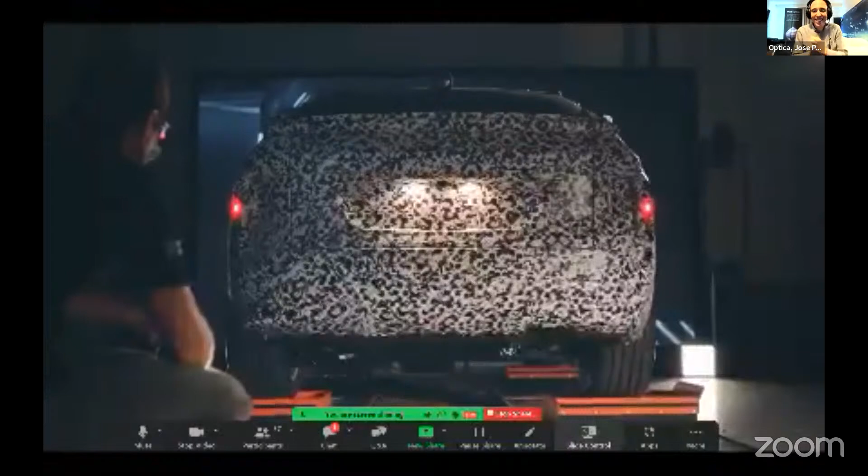The whole idea is to make sure that we understand what the next OEMs and Tier 1 suppliers in automotive need from the rest of the supply chain of photonics. And today we have a great supply chain of photonics. We have companies that manufacture equipment like Besi, like ficonTEC. We have companies that manufacture micro-optics, like SUSS MicroOptics, like EVG. We have companies that manufacture laser detectors. The entire supply chain is here.

My name is Jose Pozo, and I speak on behalf of Optica. Optica, the big publishing group, Optica, the big individual membership society, Optica, the big corporate member society, now with 400 industry members trying to find ways to work together. I lead a team of experts on the photonic industry, and our job is to find business for you.

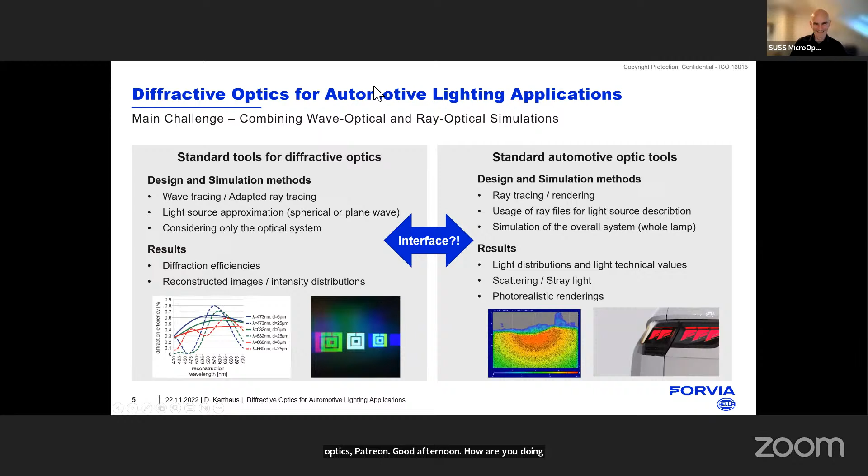Patrick, good afternoon. How are you doing? Hi, Jose. It is great to have you here. So just heard the challenge on the table by Hella, a company I know you know well. I think there is something here that you can contribute and start having the discussion.

Daniela is an expert, and we're in constant exchange with our team. It's amazing to see what they do with diffractive optics. We do more refractive optics for automotive. So yeah, that's a great collaboration so far. I think you have something to show us, right? Yes.

So this is what we do. We're covering many of the things that Daniela showed. We're also doing these projections, these semi-dynamic projections, MLAs for that. You see the setup at the top - this is the typical setup: LED, collimator, and a micro lens array. We concentrate on the micro lens array, and we can do the simulations for these as well. You see a snapshot of one of these optics here, and we manufacture them on a wafer level, which is very competitive if you go into large volumes. These can be used for projection optics, for headlamps, and for interior projections. We have perfect light mixing, color mixing, and you can project on curved surfaces.

Daniela was talking about the different needs for diffractive optics, diffraction efficiencies. Is there anything you can provide here, added value to the diffractive surfaces, such as the use of coatings? What is the standard process that you use for the diffractive elements?

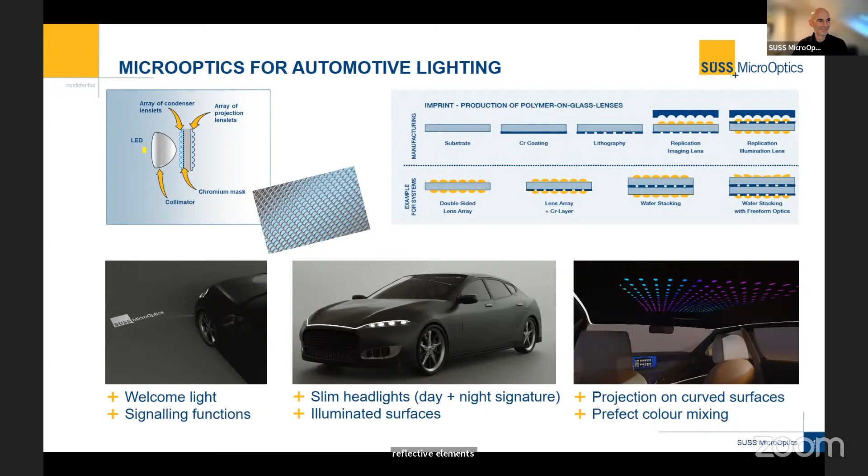So currently on our refractive optics, we don't use coatings - they're coating free. For the headlamps, we just had a very interesting simulation done where we can show that we're reaching up to 40% total efficiency of these headlamps, which is amazing for the small volume of these devices. The volumes, especially in the Z direction, are very tiny - you have these small slits, almost invisible, and you still can achieve 40% efficiency.

Yeah, and I guess now I will get a question from Paul Henry or from others - Paul Henry is also pushing for this, from Volvo, for a long time.

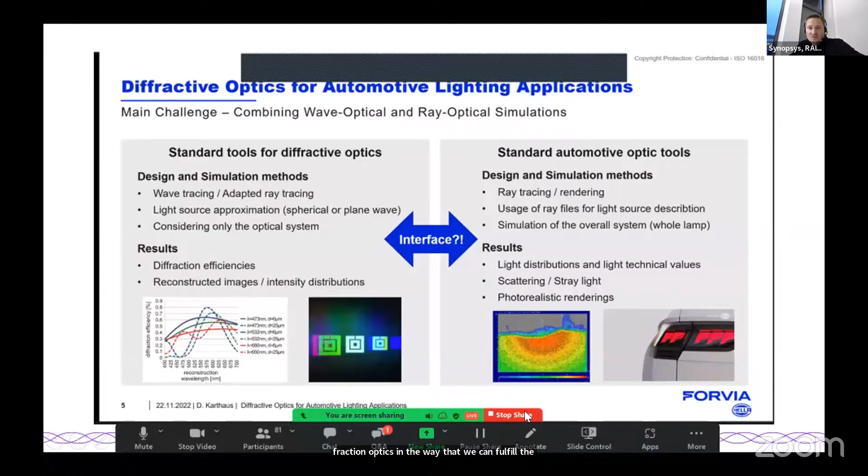Hello everybody. For us, it is important to know what is really required between diffraction optics and geometrical optics, because our business is to provide optical design tools, like simulation software. I'm not sure if Daniela's company is aware, but they are using our tools already in the method of geometrical ray tracing, but still not the diffraction tool. So we recently started to take a deeper look into diffraction optics in the way that we can fulfill the needs of meta optics and design meta optics, in order to fill the gap between - or let's say in order to produce or exchange classical optics with diffraction optical elements. It could be useful for imaging optical approaches, but also for illumination optical approaches. I would like to have maybe an offsite discussion later on, what is really needed and what is maybe not needed, so that we can develop our tools in the right direction.

Let's scratch the surface first there. Daniela, can you tell us a bit about your idea, what is needed when it comes to simulation and design of flat optics?

Yeah, of course, I cannot go too much into detail, but in general, as I mentioned, we know that kind of adapted ray tracing is already used to simulate diffractive optics, and their standard or regular surface functions are used as a description for the diffractive optics. We need something where we could also simulate stochastic optics and the like - not just regular shapes like gratings or the like. So we need to go more into detail, and we need to find really an interface so that we are able to use the typical analysis tools for our product at the end. So we already have such an interface, and if you want more information about this, we could come together and I can speak about this more in detail.

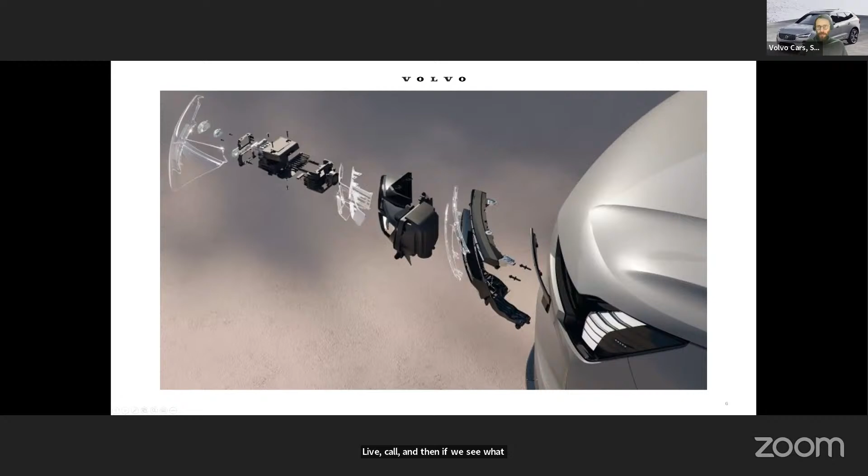And then if we see how this lamp is designed, you can see a lot of components. But what is quite interesting is that we have this same concept when we are by day and when we are by night. So you can see above, it is a daytime running lamp. And then this lamp will open, and you can see through this daytime running lamp, you have the low beam. And then we have a moving design with a lot of components.

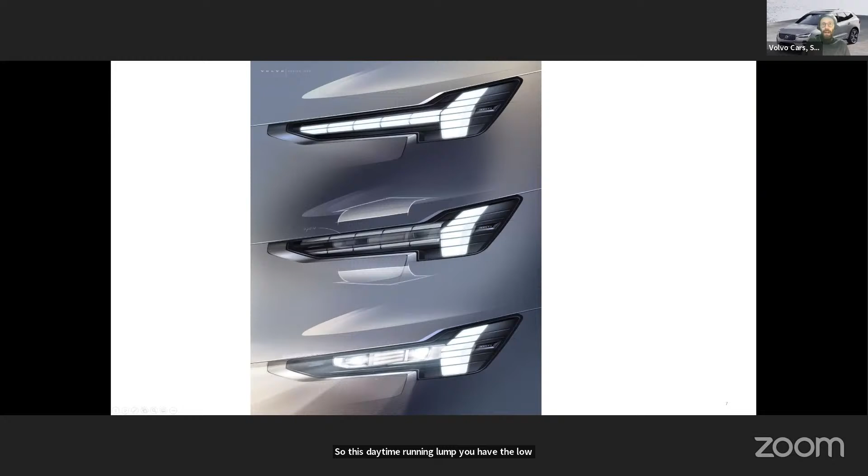And then you can see on the video, I think perhaps you have already seen it. So we have daytime running lamp, and then we open the hammer, and then we go to low beam, and then we have always the same shape. In daytime and in nighttime, we see the Thor's Hammer design. So what you see is that we have designed this lamp with a mechanical concept, with stepper motors.

The question I have is quite simple: we would like to do it only with a digital solution, only with an optical system, to be able to have this design by day and by night with the same optics. So is it possible, and how can you support Volvo to be able to do this design in the future? Thank you very much.

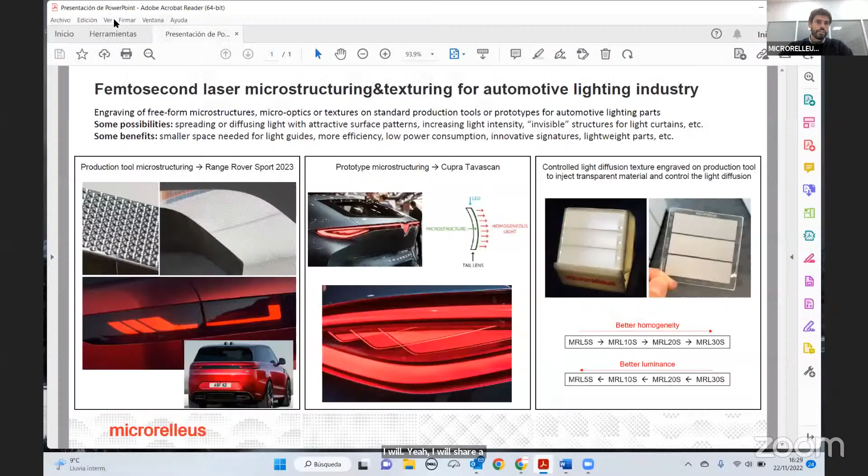I will share one slide just to share what we are doing. Can you see it? Yes. Great. So in microrelleus, what we are doing is femtosecond laser engraving of freeform microstructures, micro-optics, or textures on standard production tools or prototypes for automotive lighting parts.

So some possibilities thanks to this engraving in the tool are spreading or diffusing the light, increasing light intensity, invisible structures for light curtains, and so on. Some benefits: smaller space needed for light guides, more efficiency, low power consumption, innovative signatures, lightweight parts, and so on. So the three ways that we are working in the automotive lighting industry: engraving production tools, microstructuring them, like the example in the Range Rover Sport 2023, where we engrave all the micro-optics on the production tool to achieve this homogeneity in the tail lamp.

Another example of what we do is microstructuring or texturing prototypes, like the Cupra Tavascan concept, where we engraved thousands of microprisms in the tail lamp to achieve this homogeneous light curtain.

The third way we work is engraving production tools to make textures, developed here in microrelleus, for controlled light diffusion. The idea is to inject transparent PC or PMMA and have controlled light diffusion just from the texture engraved in the production tool, achieving better homogeneity and better luminance. That's in general terms what we do in microrelleus for the automotive lighting industry.

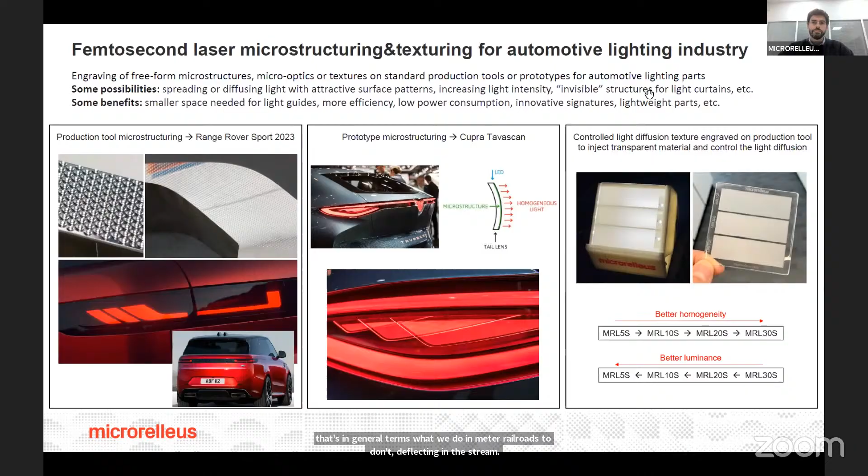We need to discuss something now, because I can see we have three different ways of manufacturing micro-optics. First we have SÜSS MicroOptics, Patrick, who told us about nanoimprint lithography, a master and imprinting. Now we hear you saying you can do it with femtosecond and picosecond lasers, in this case femtosecond laser, and you can actually engrave any structure.

We have a third one. I think we have somebody from FEMTOprint in the room. Rolando Ferrini, ciao. Thank you very much for joining the meeting all the way from Switzerland. You bring another one to the table. I'd like you to tell us what is the manufacturing process of FEMTOprint, and then I'd like to have a discussion with Paul Henry and maybe also Daniela about what is the ideal manufacturing process.

Hi Jose, thank you very much, and thank you everybody. So at FEMTOprint, we don't print directly into the glass. It's a process combining laser writing with a femtosecond laser. We create a voxel into the glass where, due to the high power in the voxel, we have two-photon absorption processes that have different effects on the glass.

Mainly, two things can happen: you can fragilize the glass or you can densify it. If you densify the glass, you can make waveguides, which is not relevant for micro-optics. If you fragilize the glass, you make it more sensitive to etching. Afterwards you do an etching process and remove the fragilized glass, and like this you can actually 3D shape glass.

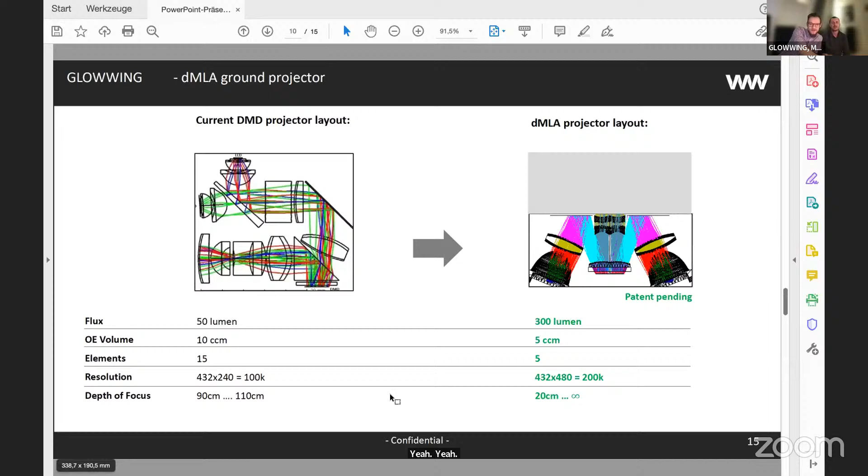The idea to bring that to the digital world is to use one of those ghosts as the illumination path. So you hit your DMD under an angle, and if the pixel is in on state, you reflect the light orthogonally, and then the twin neighbor micro-optical channel works as a projection lens. And if you can do that channel by channel, you can do the same trick that we did for the static image MLA like 14 years ago.

You can shrink down the volume of any projector. It's not dependent on the étendue. So it works for the small DLP chips, like 0.2 inch up to 0.55 inch - from 200 lumens up to, we have a design with 1,600 lumens and 160 lux.

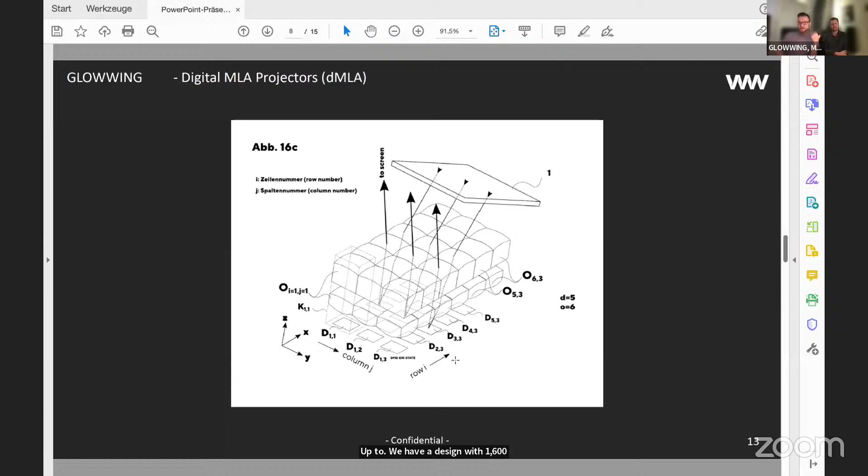So with this approach, you have solved the homogeneity problem.

Are we in business? Yes, I think it is promising, but automotive lighting is a small world. So Marcel has all my contacts, so we can do a meeting. You're very welcome - a couple of people I want to bring to a table on that.

Give me one more minute, because we talked about the static world with SÜSS MicroOptics some minutes ago. We have a brand new innovation coming up in about 4 weeks. We start our new module that has an output of 300 lumens for a static image out of a matchbox size package - so very, very compact, fully automotive certified with comparable pricing for static MLA projection.

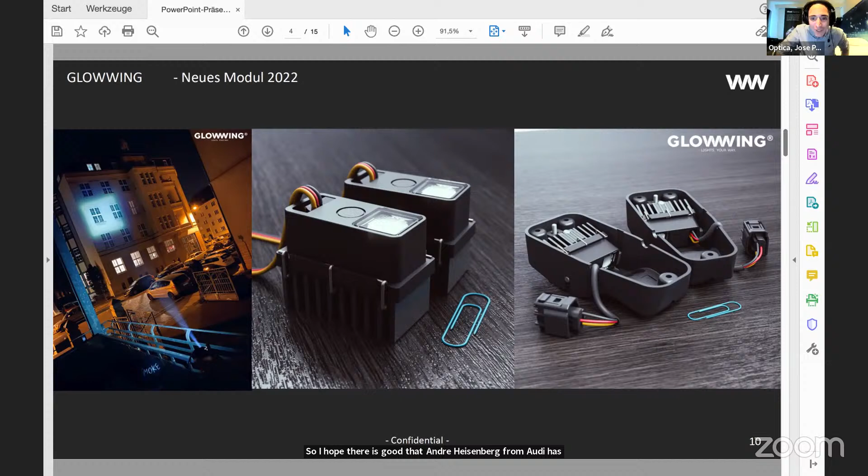Yeah, I would have one question. My colleagues were already in contact with Glowwing - it's interesting, very interesting. My question would be specifically: do you really own the full DMLA IP, or are you relying on IP from other companies?

So we own the IP. Okay, short answer, but good answer. Oh yeah, that's the answer you were waiting for.

Ralph, tell us what's on your mind. Yeah, just a quick idea.

I don't know if this is really helpful, but before in Optech and in parallel to in Optech, I'm also an electronics and optics engineer for the past 25 years. About 20 years ago, we developed - not for the main headlight, but for position lamps and daylight lamps - a very cheap structure made out of Mie-scattering transparent objects.

We basically dissolved very tiny ceramic particles or polytetrafluoroethylene particles in transparent plastic. And it was nice to see that you do not lose much light, because Mie scattering means the light gets a direction. That worked actually quite well, and we didn't need any laser structuring or surface structuring.

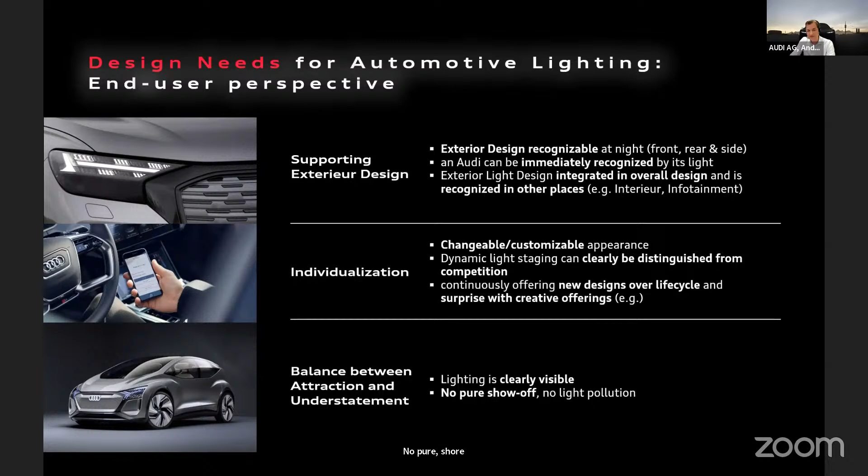And as you might know, as I said, Audi is a design brand, so it always has to be design compatible. We have to really think about technologies that can increase our exterior design. So with this, I want to go into the discussion with you, so what maybe the community can offer with regards to the points that I just mentioned.

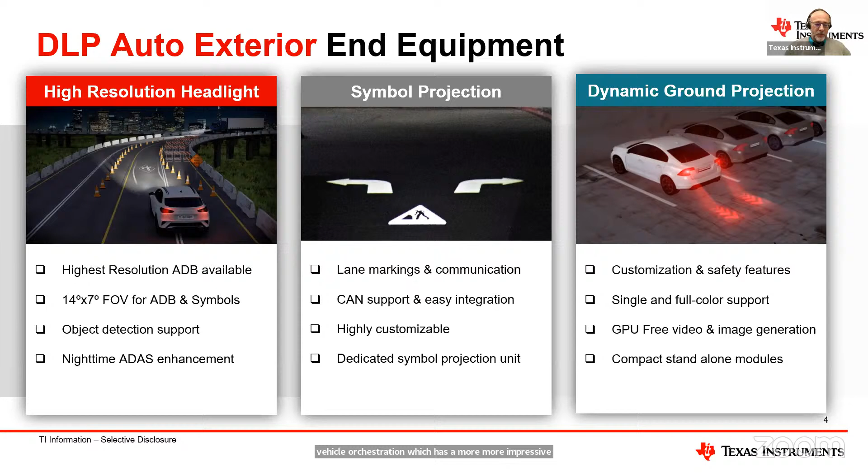And when we talk about safety and use cases like this, we have things in mind like projecting warnings for the most vulnerable road or traffic participants, like pedestrians or cyclists, particularly at nighttime, where most of the fatal accidents happen, as we have heard in many industry meetings and conferences in the recent past.

So our technology provides a solution that is programmable. It can show animated or video content, which gives you a lot of flexibility to have this dual use application that combines the safety use case with a more sophisticated vehicle personalization and welcome scenarios for individual customers or for fleet customers.

And here we have a lot of different possible applications that can be installed as a small light replacement, just with power and ground provided to the module, or something that supports live video stream. The way in the middle would be an instant-on operating tiny module that is in-vehicle reprogrammable. And maybe I'll share something I'm proud of, that Andre and a lot of others know that module or example pretty well.

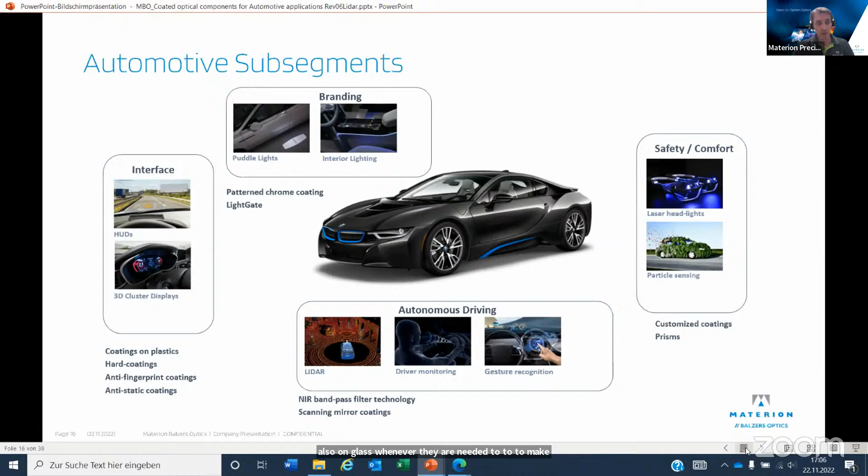Headlights is clearly also one of the applications. What we offer are especially coatings on polymers, but also on glass whenever needed, to make the applications and products that we have discussed before.

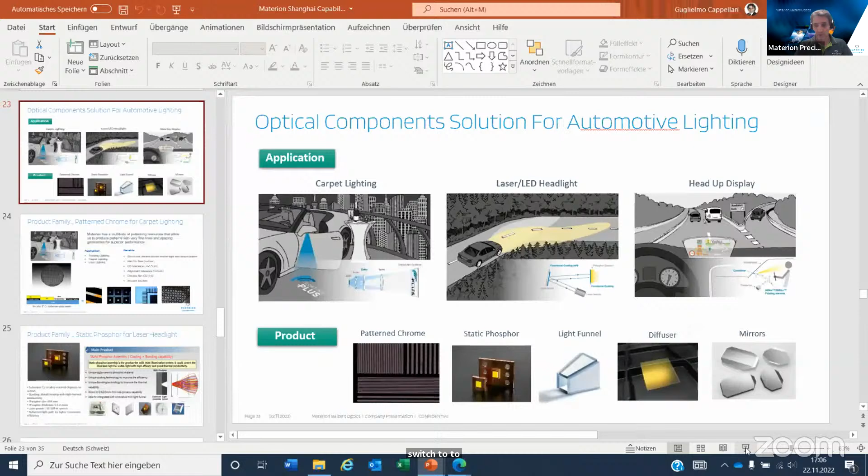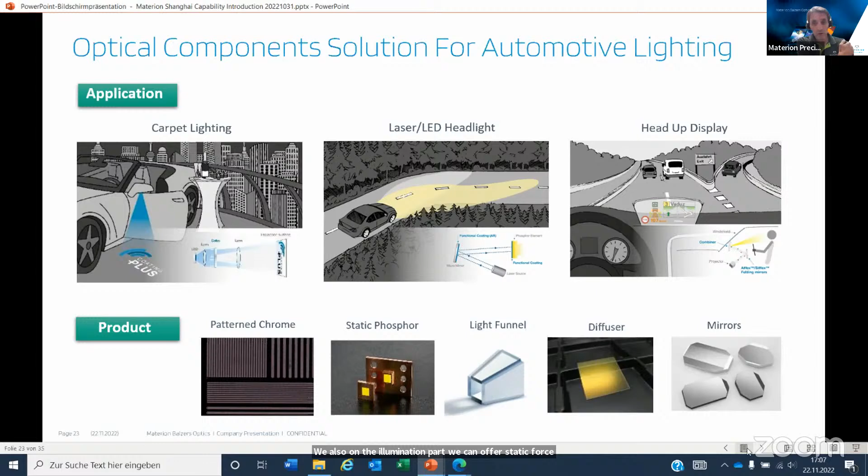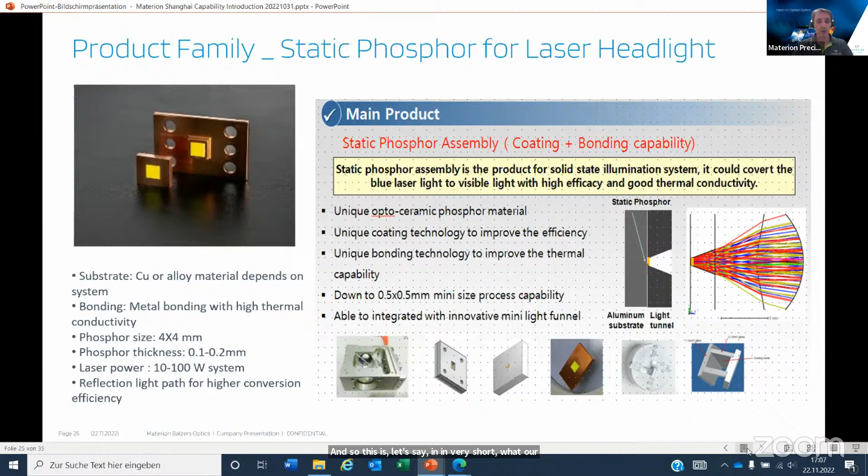Let me switch to a second slide to give you a rough idea what this means. We offer patterned chrome coatings. On the illumination side, we can offer static phosphor components for illumination. Patterned chrome, as said, is in use for welcome lights in our products. So this is, in very short, what our company offers for the applications we've seen today. And just to remind everyone, on our webpage you'll find dedicated materials and brochures with our complete product portfolio for the automotive industry, especially for automotive lighting applications.

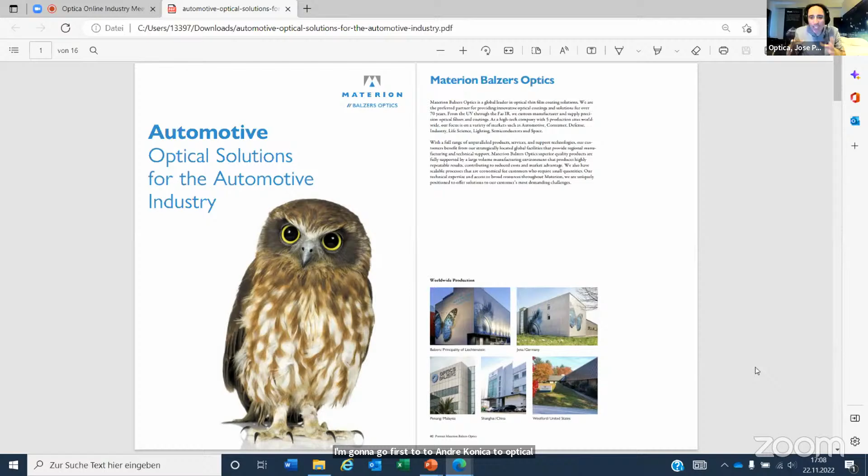So Paul, Henry, Jeremy, Andre, can you please challenge Materion on what are the main needs for coating? I'm going to go first to Andre. When it comes to optical elements in automotive, what is the biggest challenge that can be solved with coatings, with thin film technology on the optics?

Hey, can you hear me? Yes. Okay, I'm already unmuted.

So you mean with coatings in general? Specifically, I would say to have the coatings, we are looking for really slim lines. You might be able to help us with this. So maybe we can have a chat and a meeting to talk about this.

Okay, let me also go to. Let's go to Magna now. Let's go to Jeremy, because we want to bring you to the table. Jeremy, it is your first time at this kind of setting.

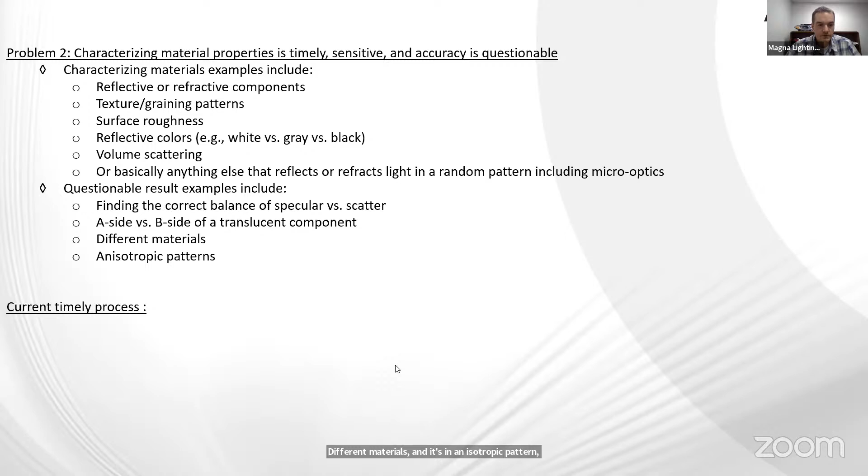So the current process is to retrieve an actual sample, whether it's a textured plaque, a colored plaque, a micro-optics plaque, any kind of sample we would need. Then we have it scanned, we can send it out, and these would take about 4 to 6 weeks, really depends. We populate it on the software and confirm the accuracy, and it takes some time.

Each step has its own list of concerns for time and accuracy, so it's a delicate system. We can confirm the accuracy in a controlled environment, but it takes a little bit of time and you need to make sure you're doing it right in the lab. But applying a single result to any condition lacks accuracy and creates questions, so there's always concerns with that.

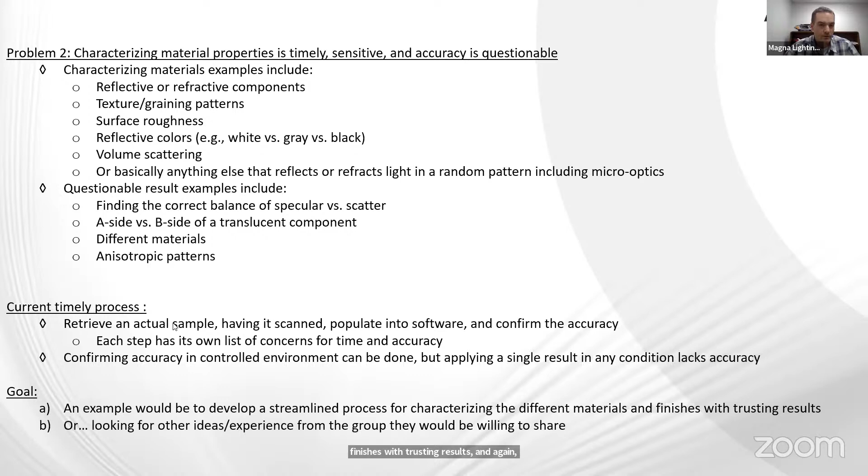So my goal here would be to develop a streamlined process for characterizing the different materials and finishes with trusting results. And again, I'm looking for ideas and experience from the group that they'd be willing to share on how to get these into a better process, really. So thank you.

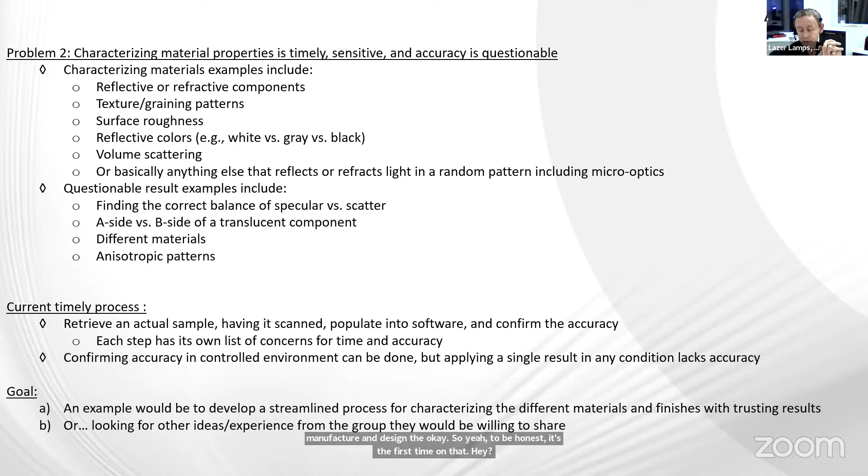Thank you very much for having me, it's the first time in this call. We're an aftermarket lighting specialist, we manufacture and design the products here in the UK. To be honest, it's the first time I'm hearing some of these interesting points, and there are definitely some good ideas coming, but I'm probably more of a spectator today, Jose.

I have a few questions for Lazer Lamps being texted to me anonymously. So the first one: you are focusing on LEDs - what are the wavelengths that you are mostly targeting, and what is the future for Lazer Lamps? Are you going into laser lighting as well?

We're certainly interested by laser technology, so we've been trialing some of the components that are on the market. But to be honest, at the moment it's not delivering the required level of performance versus the power consumption for our customers. We're also not satisfied on some of these chips we've been testing regarding color rendering. So for us, we're still very focused on LED.

The name Lazer Lamps goes back 12 years when I founded the company, so at that time it wasn't particularly planning for the next generation technology, but we're LED focused. All of our products are using normal LED technology you would expect to see in automotive.

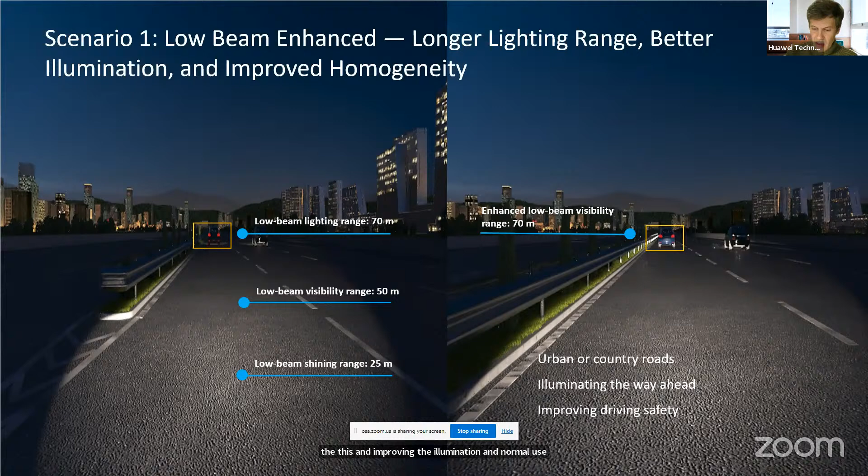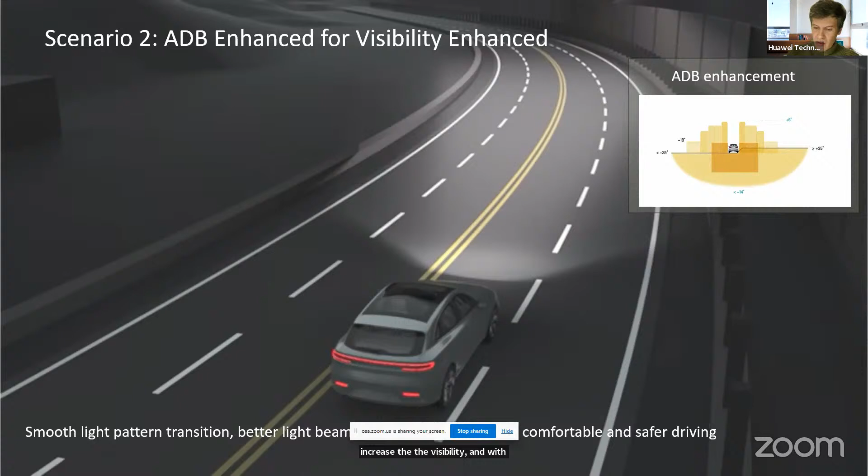So we have identified 6 different application scenarios I will show you right now. First is about improving safety for drivers and other road users by increasing the low beam - enlarging the range of the beam and improving the illumination and homogeneity. Especially in urban or country roads, illuminating the way ahead is key for driving safety. Also, adaptive driving beam will enhance visibility with multiple cut areas with variation in size and intensity.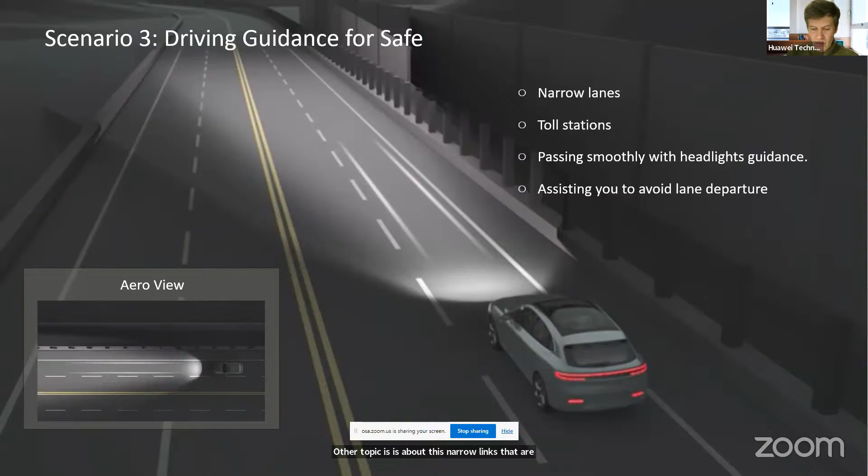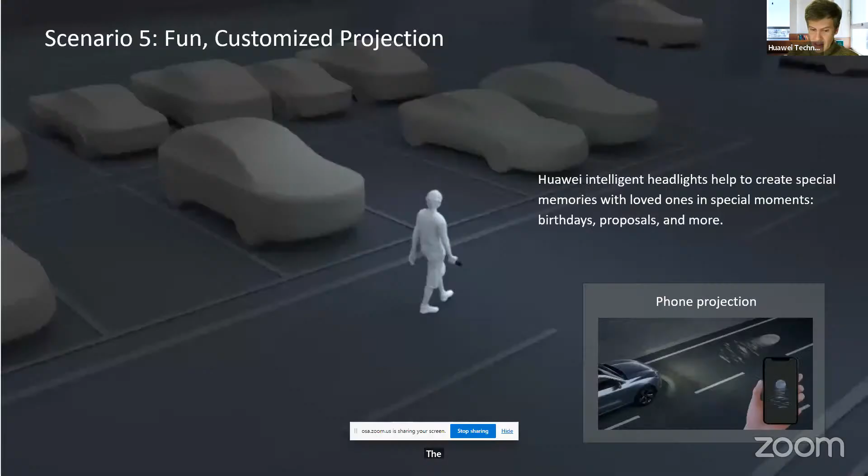Another topic is about narrow lanes that guide you in special difficult areas, avoiding that you invade other lanes. Also, we can see synergy between projection display systems, and the evolution is toward communications, like projecting information onto the road. Vehicles will interact with the environment through dynamic projection, the so-called light carpets, illuminating the surrounding areas outside the car. Also, high-resolution headlights can display sharp symbols, lines, or figures directly on the road in front of the car and close to the point of interest of the driver. So the displayed information varies from vehicle to vehicle - distance alerts or animated greetings, for example.

Vehicles are quickly becoming the third living space for people after their home or workplace. This is why user demand for visual experience on the go has been increasing. Users expect immersive experiences that deliver images and video with higher resolution and broader views. So the developments related to digitalization of cars lead to new approaches to safety, comfort, and information services.

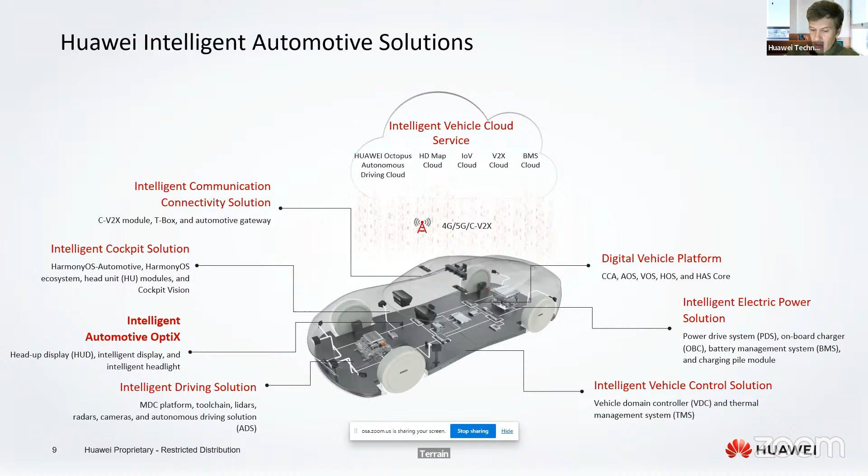The evolution of technology and applications is bringing more complex systems, more components, and subassemblies. Implementing these advanced front lighting systems, including intelligent lighting, process sensing, fast computer, and software control, has to be standardized, and a platform and architecture is needed. That's why Huawei Intelligent Automotive Solution is the global platform that integrates intelligent digital platforms powered by emerging technologies.

Like 5G, cloud, etc., and optical technologies that will connect the physical and digital world for vehicles. During these years, Huawei has demonstrated to be strong in developing complex optical systems and architectures. Huawei is bringing cutting-edge technologies to empower the optical intelligent vehicles. We can see that optical connectivity allows high bandwidth, lightweight, insensitivity to electromagnetic interference, even low cost. In-vehicle optical technologies offer a richer immersive experience and also are an intuitive tool for vehicle driver interaction that improves driving safety.

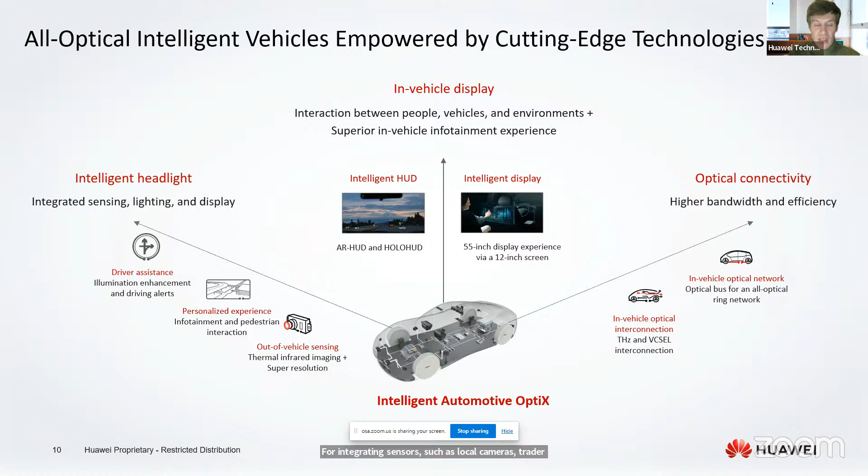Finally, automotive lighting is becoming one potential critical node for intelligent lighting, because lighting systems could represent a key location for integrating sensors such as local cameras, radar, and LiDAR with the most advanced projection and illumination systems. Intelligent vehicles are the product of multiple industries built on integration of core optical and digital technologies with traditional mechanical technologies.

Huawei Intelligent Headlight Solution is also implementing 3 modules: the intelligent light module, the LED driving module, and the headlamp control module into the headlamp assembly. These are highly integrated systems using serial bus and communication protocols to connect intelligence devices for real-time control applications. The intelligent light module is the core of the optics and the light controls.

So summarizing, we see that with the new digital headlight technologies, light distributions will be reinvented. High resolution combined with flexible software and sensor integration open up options that were inconceivable before.

Thank you. Thank you very much, Fernando. Thank you for a great presentation. I honestly had bets with some people in the room about how much you would be willing to share in a meeting like this. And to be honest, you have gone beyond our expectations. So thank you very much for that.

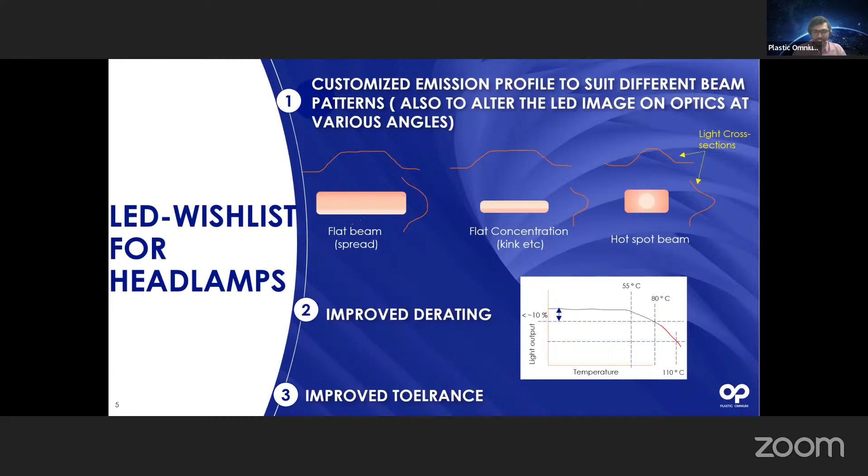I know what the answer is going to be, but I'm going to ask anyway: plastic or glass? Where do you stand? Well, I think it's still plastic because it's fairly flexible. We have several shapes, and I think that's where even the industry is looking. It's mostly the plastics that we use.

Are you sure? Let's make a round, let's see how it works. SUSS MicroOptics, Patrick, plastic or glass? It depends, of course it does. I mean, we do hybrid systems combining plastic with glass. If we had plastics available to replace the glass, we would go full plastic. Currently, we don't have that solution on the market.

Let me see who has that solution on the market. Let's go to HELLA, let's go to Daniela. Daniela, plastic or glass, a solution? Well, I have a comment on that. I think, as Patrick already mentioned, it depends on the use case, especially when we want to collect as much light as possible.

We heard that the LED has a Lambertian characteristic, so we need to go as close to the LED as possible with our optics. Then we get, again, a problem with temperature, but this time for the material of the optics. Therefore, sometimes glass is the best option when we have these high temperatures. But on the other hand, as we already heard, we have this great range of possibilities concerning the shape, of course, only with plastics, in a really economical way.

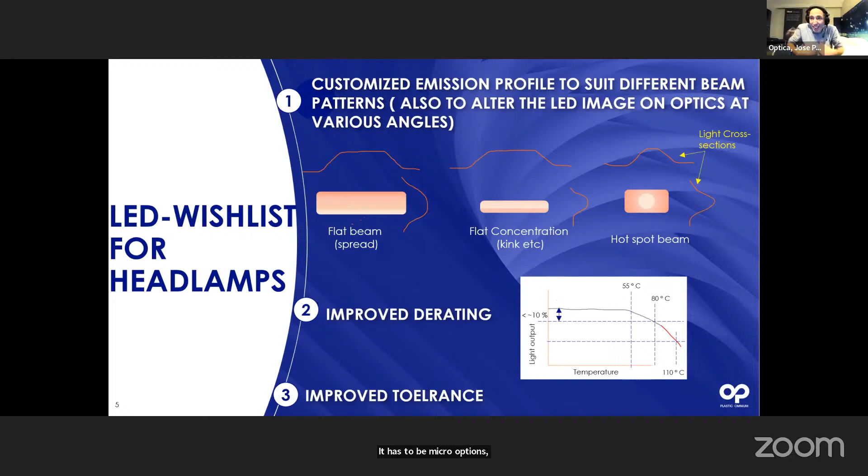So if glass is the point, and if people want to develop this at mass volume production, we can hit the target. Daniela: From observing the industry for a few years, but mostly from observing what HELLA and others have been doing, it does look like we are going more toward customized, more direction of beams, more movable mirrors. And for me that is obvious that it has to be micro optics, diffractive optical elements in them, and at the end it has to be made of glass. For me there is no other way around that.

It's something that goes wrong there. Again, it depends. In the future, okay, but that's not what we're talking about.

Well, for example, when I come back to the development of the flat light, as I already mentioned in the presentation, when we look for optical stacks, and especially for optics with a great or large surface that need to follow the car, contour the car body, let's see which material it could be. I think for some use cases glass will be really fine, but especially for 3D curved elements or something like that, we have to see.

I believe that we are going to have a combination of both. I believe that we are going to have high-end lighting coming very close, very fast to the car. We're going to have directional beams coming tomorrow to most of the cars, and I think this is a huge future for plastic, but also especially for the micro-optics revolution.

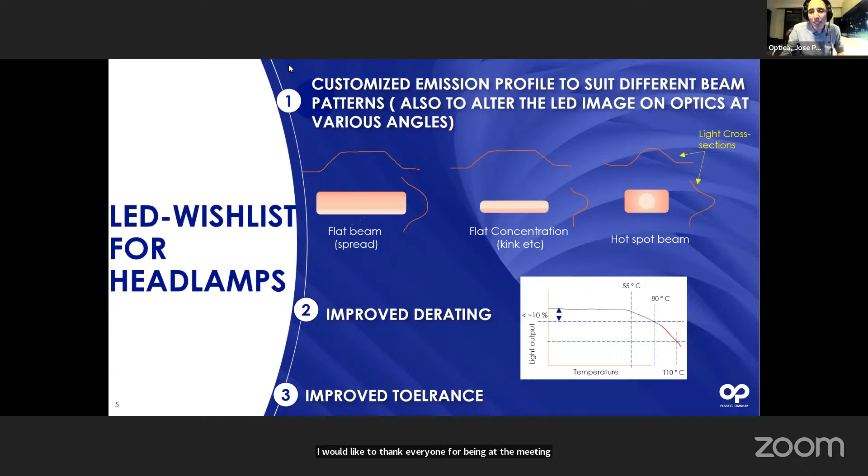I would like to thank everyone for being at the meeting today. It has been for me a quite enlightening meeting, but just remember, this is just the beginning. At this moment, what we want to do is create a community. So the success of the meeting is not on the meeting itself, it's on the follow-up. After the meeting, we're going to circulate to all of you the participant list, not just the people in the meeting, but the entire list, all the people who registered or who can contribute to the topic. All we ask is that you have a look at it and let us know with whom you want to get in touch, because at the end of the day, that is what matters, that we all get in touch with each other. Until next time, thank you very much for being with us.